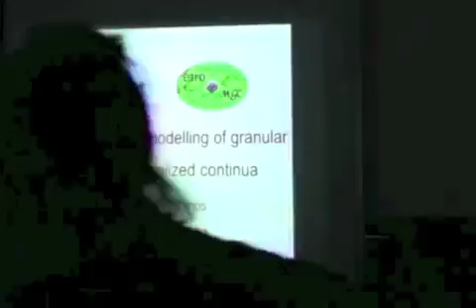To present my work on powders. First of all, I will say that I am not an expert in generalized continua, nor in any continua. So I came here just to show you a very complex media and to see if you could be interested in understanding what is going on. So this work has been made in collaboration with several industries, and I will try to show you the qualitative important things in powders.

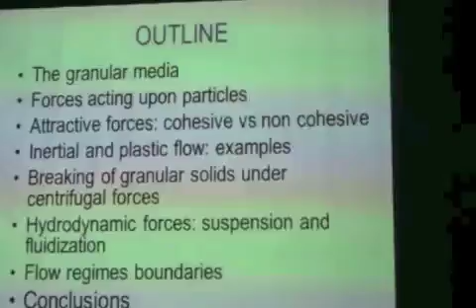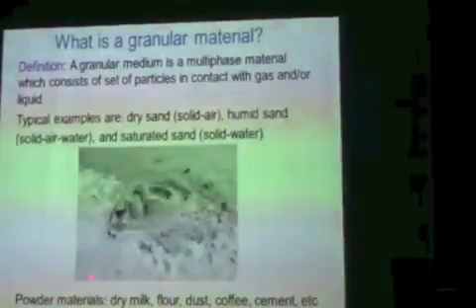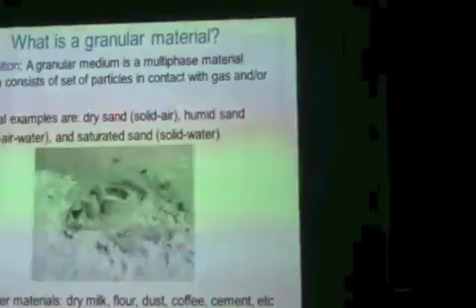So what is a powder? It's easy. It's a set of particles in contact with gas and or liquid. And there is an example that everybody knows. So dry sand is solid-air, humid sand is solid-air-water, and saturated sand is solid-water. This, as everybody understands, is non-cohesive, this is cohesive and complicated, and this is non-cohesive again.

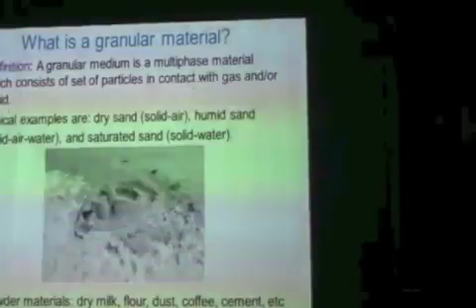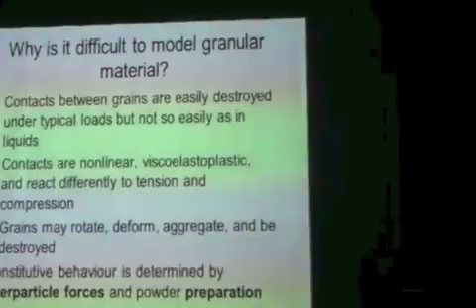Well, why is it so difficult to model granular material and why are there really no good predictive models? It is because contacts are not like in solids. They are easily destroyed under the typical loads that are used in powder processes. Also contacts are by nature non-linear, viscoelastoplastic, so they have all complications and react differently to tension and compression. In addition, grains may rotate, deform, aggregate, and be destroyed. In addition, the initial state of the powder is important.

Well, I would like to discuss the important forces in powders. There is gravity force, if we are on Earth, and there are attractive forces that are universal in the sense that no matter what you do, these forces are there. These are van der Waals of universal character, capillary forces due to humidity, which are easily present, and electrostatic forces due to tribocharging that are always present also. Also, because of the ambient fluid, there is hydrodynamic drag acting upon the particles.

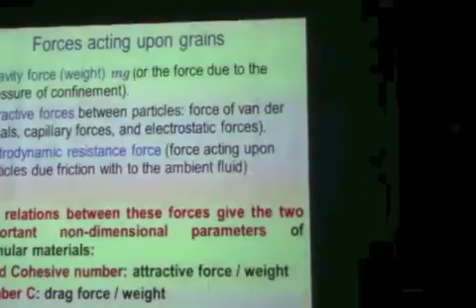So the relation between these forces practically determines the behavior of these powders. One of these non-dimensional numbers is the Bond cohesive number, which is the attractive force compared to the weight. And the other one is the drag force compared to the weight. Well, we define the boundary between cohesive and non-cohesive powders by this number: Bond number equal 1.

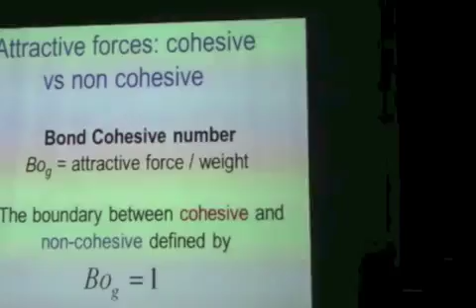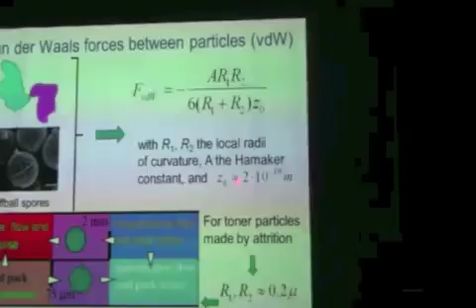Let us describe briefly the three forces that are present universally. One force is van der Waals forces. Van der Waals forces have this expression where R1, R2 are the local radius of curvature of the particles in contact, A is the Hamaker constant, and zeta zero is the distance of smallest approach.

When you compare this force to the weight, if you consider a simple case, perfect smooth spheres, these are polymer spheres of density order 1 and Hamaker constant 0.5 10 minus 19 joules, you see that for these polymer particles, if you go below 2 millimeters, then these particles begin to be cohesive.

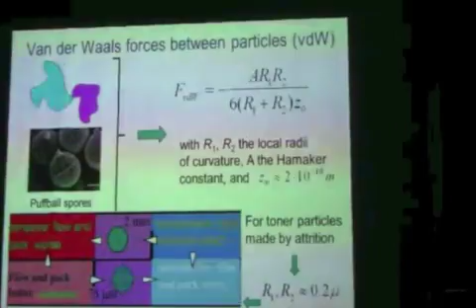If the particles are irregular, which is the normal thing, there are no perfectly smooth spherical particles in nature, then you go down to 75 microns, as we have done with toner particles. These particles are used in xerography. So this is important because these cohesive particles are usually small in size. We will see why in a moment.

The other important force is due to humidity, water condensed at the contact points. As you see here in the photo, these are the liquid bridges, and then minimizing the surface tension for a given volume of liquid, you obtain the force that attracts both particles, which is given by this expression, and in contact, with Z equals 0, it is a maximum.

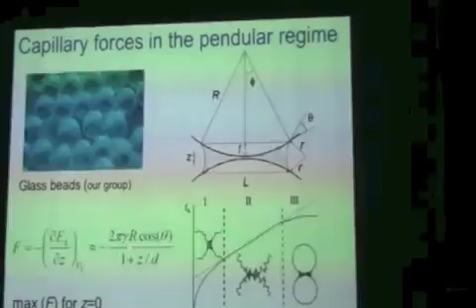Here it shows what happens when you have a very small amount of liquid. When you have a very small amount of liquid, this R is the local radius of curvature of the asperities. Then, when you have enough, R is the radius of the particle.

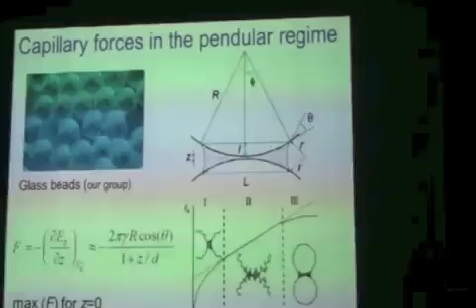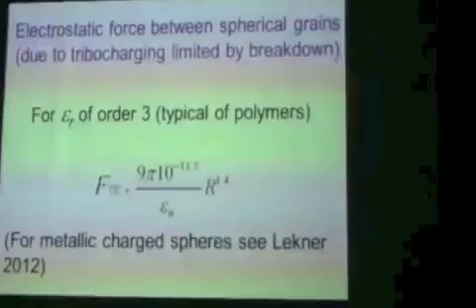And another force that is always present is triboelectrical forces. This is naturally due to collisions, friction of particles. And this force is limited by electrical breakdown of the air. So in that case, if we use this upper limit for the charging by triboelectricity, we have the expression for the force. We can compare the importance of these forces for fine particles.

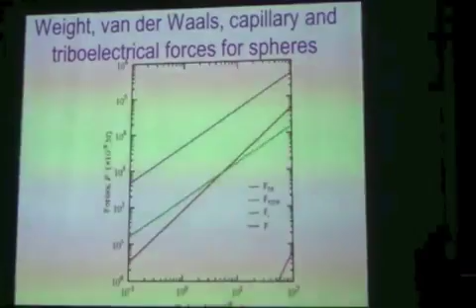Then it comes triboelectricity. Triboelectricity equals van der Waals forces around 9 microns, and this has been the cause of a lot of controversy, because some people in the xerographic industry, in the printing industry, say the fundamental forces are van der Waals. The others say the fundamental forces are tribocharging, and they never were in agreement. But you see why?

Now, these forces affect in an essential way the behavior of this powder, and it's quite different to have non-cohesive powder as compared to cohesive powder in all powder processes. So I put some examples to show this. First, inertial regime is the typical regime when you put coffee or cereals in your cup, and in this regime, which is typical of non-cohesive powders, the spacing is small and the stresses are due to collisions.

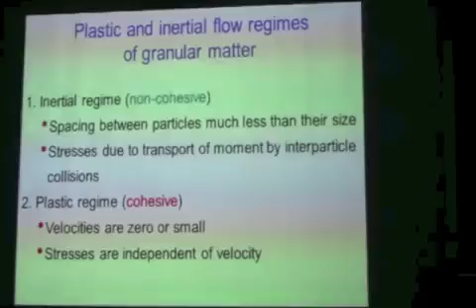On the contrary, the plastic regime is quite different. The velocities are quite small and the stresses are independent of velocity. You see here one case of

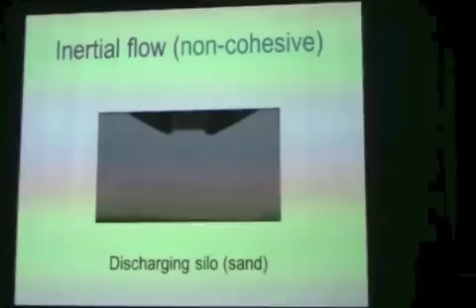This doesn't work. I have to imagine. Let me see. Stop. I don't know what's happening. Well, inertial regime, this is.

No. Well, doesn't matter. I don't know why the presentation doesn't work. Don't understand what happens. It's okay.

Now we are going to examine another problem. This is the problem of plastic flow of cohesive powder. This powder that is here is a powder of around 100 microns of ferrite covered with a plastic film, and on top of that there are toner particles. The film is to tribocharge the particles, and on top of these small particles, there are other nanoparticles that are called flow additives to control adhesion.

So these toners, when they are deposited in the photoreceptor, have to be cleaned, and they are cleaned with a blade that presses the photoreceptor and takes out the powder. So now we are going to see, this is the wedge between the blade and the photoreceptor. The powder is accumulating here and going outward. So we are looking in this direction, and what we see is this.

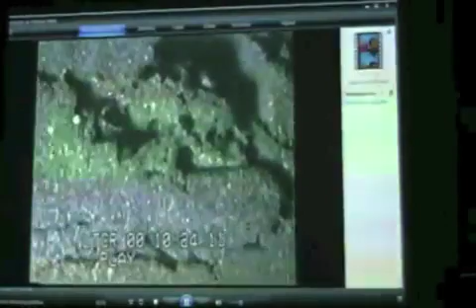I'll tap. You see this. No, sorry. Blade cleaning plastic flow. This is the kind of flow that you have to expect from fine powders, from cohesive powders. So you see, it is not easy to model, but it can be done.

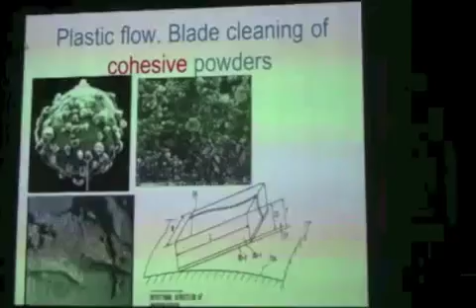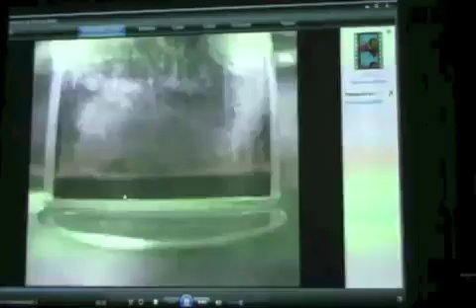Cohesive, non-cohesive. Well, this is the case of non-cohesive. You see, it's going to break because these are under centrifugal forces. So you see how it breaks, it has a characteristic profile. Now I show you the case of a cohesive powder, which is the same powder but with a different surface force, more cohesive, and you see that it breaks, but in blocks, in jumps, so it breaks discontinuously.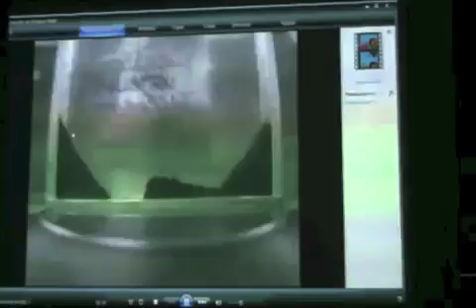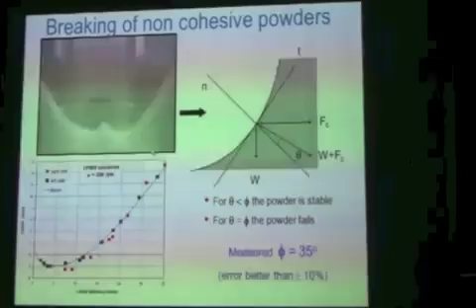So from this device you can estimate, doing a simple analysis, the cohesion of the powder and the angle of internal friction. Okay, so these profiles can be understood very easily. In the case, for example, of non-cohesive powders, it is simply the equilibrium at the surface of a small element that says that when T, the tangential force, is equal to mu times the normal force, then the surface flows. When we use this simple formula and we measure the profile, we see that it adjusts very well to the formula.

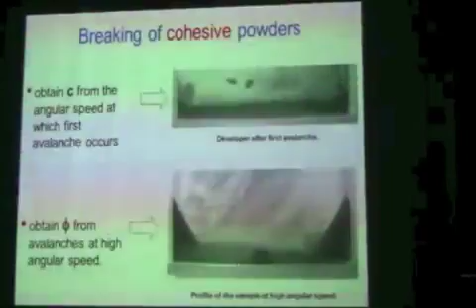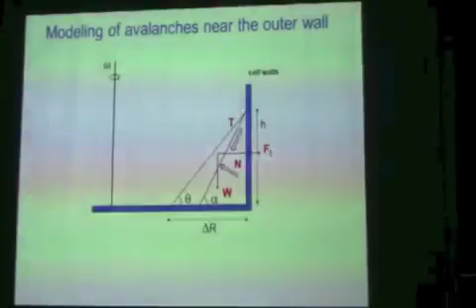In the case of cohesive powders, you see that the breaking is in blocks, in pieces. So you have to analyze this differently. For the first avalanche, we use a wedge method, which is very well known in solid mechanics, and for the outer avalanche, we also use a wedge method. This wedge is going upward under the action of the centrifugal force, and from this analysis we may estimate how the cohesion varies, which is the important thing to engineers, and also how the angle of internal friction changes. It is interesting to note that the angle of internal friction does not change with cohesion.

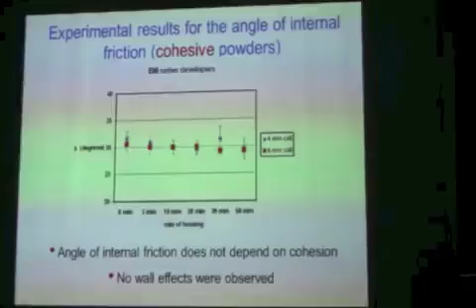Well, now I come to hydrodynamic forces, to drag forces, and here again the situation is completely different for cohesive and non-cohesive powders. To understand this fluidized regime, I'm going to put a short film. Here we have a fluidized bed. This is a suspension of powder particles. Here the air is flowing upward and the particles are suspended in the airflow. But the spacing is of the same order as the interparticle radius. So this is quite different from a suspension, where the particles can be isolated in the fluid.

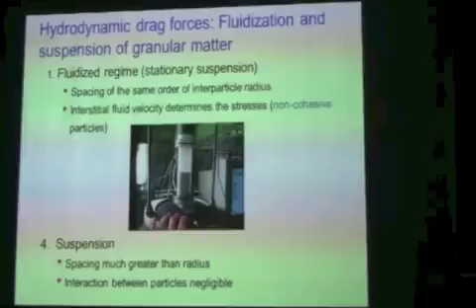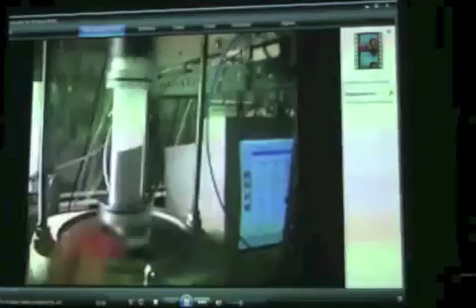This, for example, is this. This is only to show you what a fluidized state is. You see, it's like a liquid, but without surface tension. This is real. It is called the fluidized state.

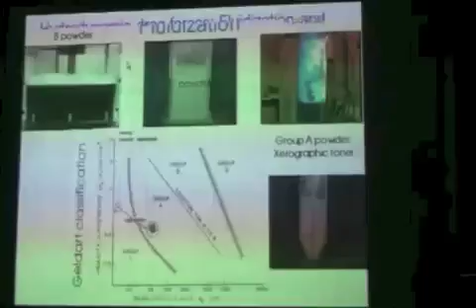The fluidization of powders shows at least 4 different regimes that are very well known, and the regimes are shown here. These are for very large particles. These are for particles of the order of millimeters. Here you see mean particle size and density. If you consider the density typical of polymer particles, you see that as they decrease in size, the fluidization changes in character. So, for example, the largest particles fluidize in what is called the D regime, which is this group D.

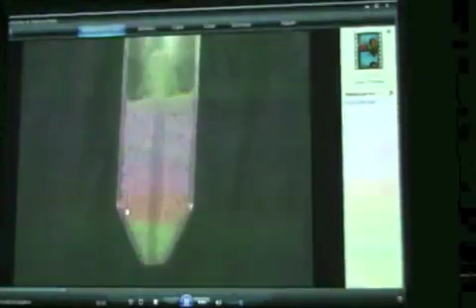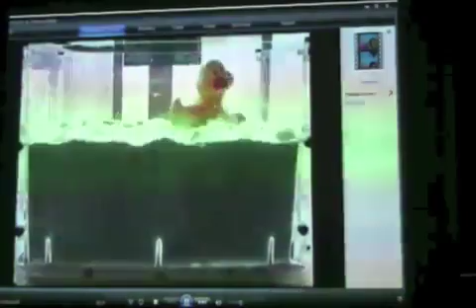All these regimes are used in the chemical industry, of course, because they are used as reactive beds. So this is one type of regime that we are not interested in, because this is for very large particles. Then come particles that are not so large, type B, ordinary particles, and you see how when you flow air, it comes through the powder bed, and the expansion is very small. Okay. Then fine powder fluidization is type A. Where is type A?

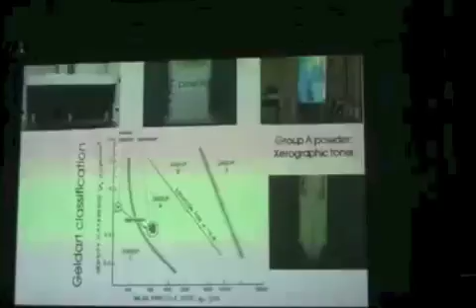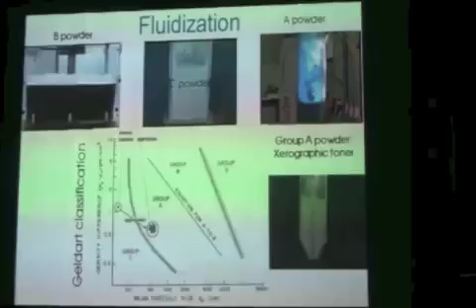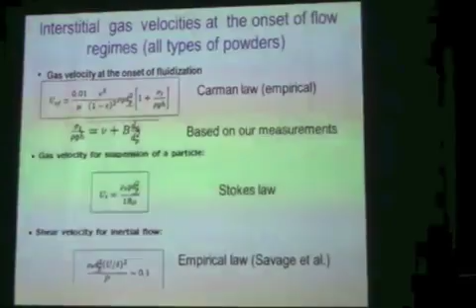This is the velocity. We have measured this for our powders, and we obtain this expression. And here is Stokes law, the velocity of suspension, and this is the typical velocity in the shear layer. And we assume that in the shear layer, the gas velocity is of similar order. When you plot these velocities against the particle diameter, you see the different lines. This is the suspension line, this is the fluidization line, this is the inertial line.

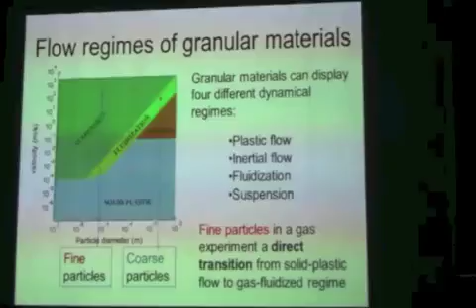And you see that for small particles of the order of 10 micron, when you increase the airflow through the powder bed, first you fluidize and then you suspend the particle. While typically, for sand or other particles, you first get the inertial regime, then fluidization, and finally suspension. This is very important for the design of any apparatus in industry, because most of the work in granular matter is here, in the collisional regime. If you try to understand fine powders using the usual published papers, you are going to fail, because this regime is not even present. So this is very important.

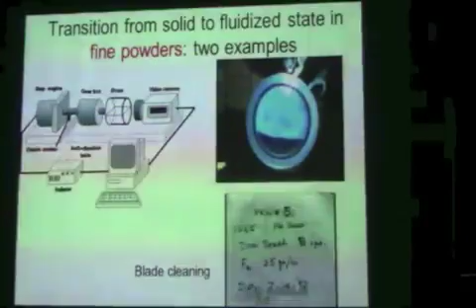And I can show one example. This is the last one. Here we have made this experiment. We have put the powder here and rotated this and studied the evolution of the profile. And you see what is here. Alta. No, sorry, it was tambor. You see, this is what happens.

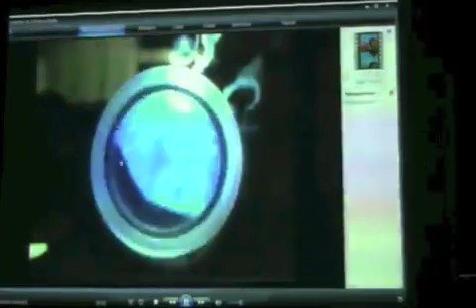When you begin to increase the velocity of the rotating drum, there are first a series of avalanches coming down and a slip of the powder along the surface of the rotating drum. But notice that the powder entrains air when it avalanches, and it takes a time to degas the wedge. When the time to degas the wedge is not big enough, then the whole powder is fluidized in the rotating drum. This is a typical situation.

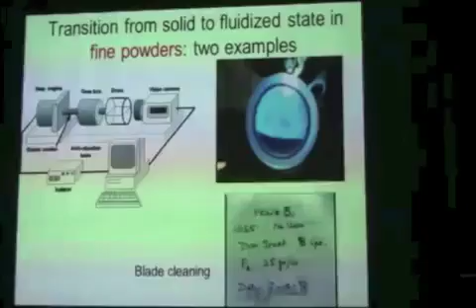So I am going to finish with the conclusion. The other case I don't want to discuss. Certainly, these media are very complex. And we have to take into account interparticle and gas interaction if we are going to deal with fine powders. Cohesive granular solids have very low density and are highly compressible. Inertial flow, we have seen, is absent, and the fluidization of cohesive powder is homogeneous and the expansion is very big. And as far as I know, there are no continuum models for fine powders.

Perhaps someone here would be able to do some model or some research on this, and at least that was my motivation to come here and to show you these materials so that you can get an idea of how they behave, and perhaps you are interested in studying some of the regimes and making a model.

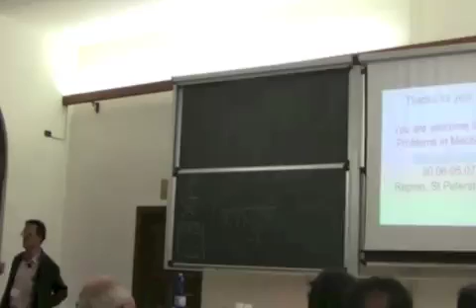Questions? When your suspension breaks into blocks, the angle of the blocks seems to be the same. Are they somehow related to something? The angle, you mean in the rotating drum? No, the angle of this block changes all the time, because the slope is steeper and steeper. So this changes, and of course the analysis depends on the angle that we have initially, and we can study the evolution, but it depends on the initial angle.